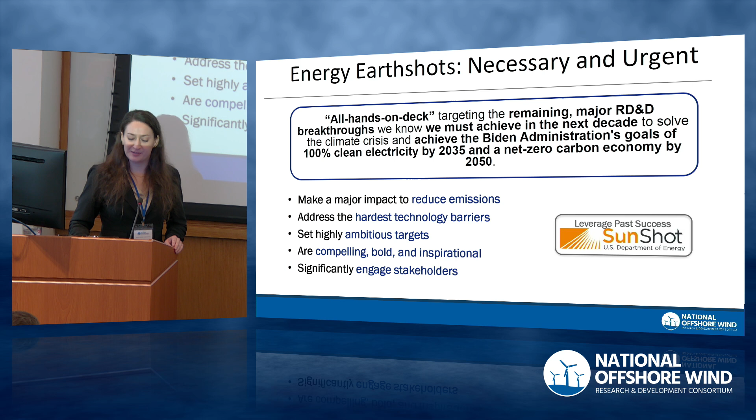Last year in September, the floating offshore wind shot was announced as one of these. This was chosen because offshore wind is especially well suited to provide clean energy to densely populated coastal regions that have large demand and may have limited space for land-based clean energy and transmission. Additionally for the US, about two-thirds of the offshore wind resource is over waters too deep for fixed foundations. So the shot goal aims for a 70% or more reduction of costs down to $45 per megawatt hour by 2035.

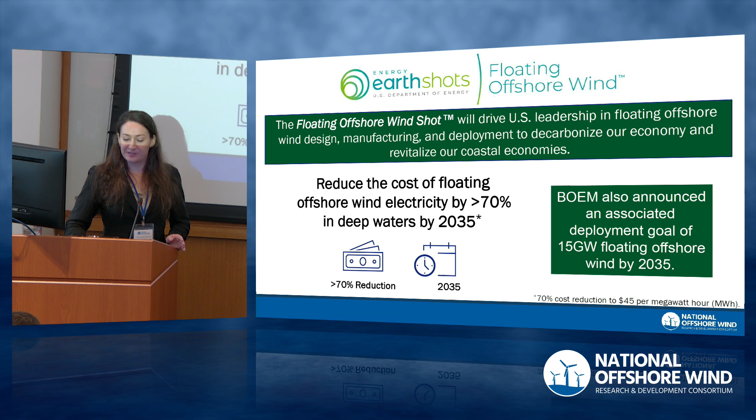Achieving this would drive US leadership in design, manufacturing, and deployment. Along with the shot announcement, the Department of Interior also announced a 15 gigawatt deployment target, with the goal of protecting biodiversity and promoting ocean co-use.

To rapidly move the United States from just technology demonstration towards commercial scale deployment is going to need an all-of-government approach. The floating offshore wind shot is a partnership between Department of Energy, Department of Interior's BOEM, Department of Commerce's NOAA, Department of Transportation, as well as the Federal Permitting Improvement Steering Council.

To address industry challenges and accelerate floating offshore wind, the shot has 5 pillars: developing cost-effective floating offshore wind technologies to harness the power above deep US waters; promoting energy justice with environmentally sustainable and just deployment to ensure marine wildlife coexists and other ocean space users can thrive alongside floating offshore wind; and benefiting local economies and underserved communities to reduce the climate, health, and environmental impacts of the US energy sector.

As well as supporting supply chain development, including port construction, and scaling up domestic manufacturing capacity, especially for turbine platforms and components, while considering local workforce, materials, and infrastructure needs.

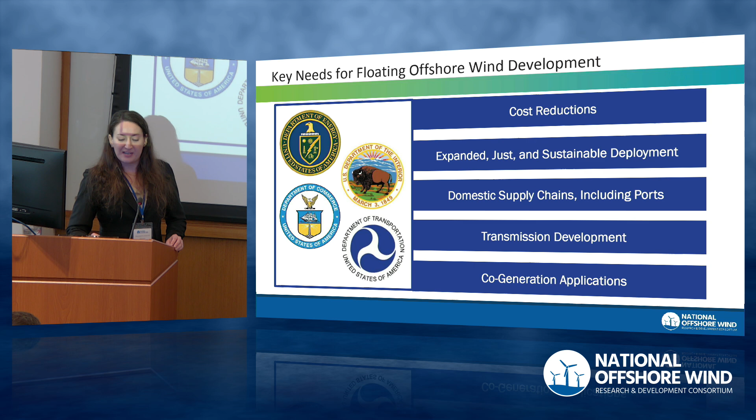Designing transmission networks and configurations to connect the best wind sources to load centers, and advancing research in future transmission technologies, including HVDC, to enable long-distance transmission far from shore. And finally, fostering economy-wide decarbonization by advancing floating offshore wind energy storage and clean fuel production.

The shot is intended to be an ambitious call to action as part of a wider effort to decarbonize the grid.

R&D contributions towards cost reduction can be made across several areas, including large turbines with higher generating capacity while maintaining high reliability of operations, serial manufacturing and design for production, systems engineering and operation, and increasing operational reliability through improved maintenance capabilities and lifetime extension practices.

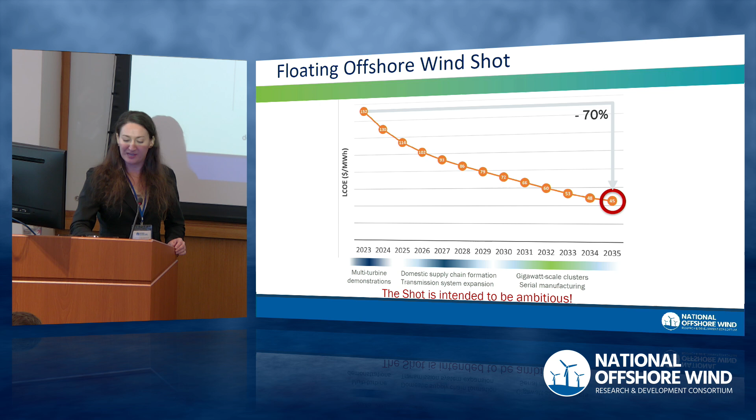Now we'll start the floating offshore wind deep dive. This is the first of two panels. This panel focuses on anchoring, station keeping, and platform stability.

We'll have Zach Miller from Triton Anchor presenting on their innovative anchoring system for floating offshore wind. Spencer Hallowell from University of Maine presenting on design and certification of taut synthetic moorings for floating offshore wind. And Biao Feng from GE presenting on the dual functional tuned inerter damper for enhanced semi-sub offshore wind turbines.

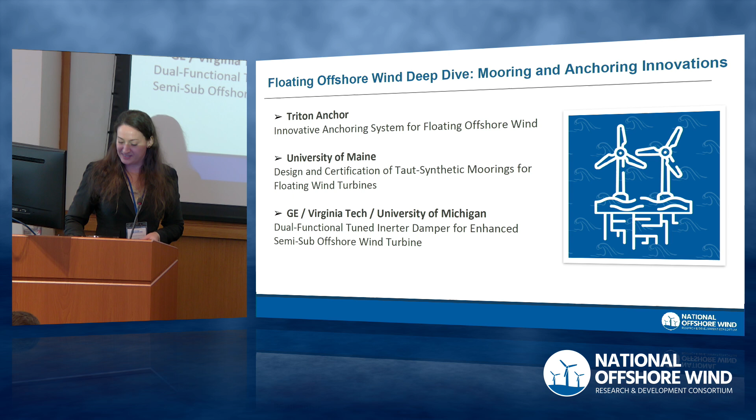Hello everybody, my name is Zach Miller. I'm the Chief Technology Officer at Triton Anchor.

Just a little bit about us: we are a spinoff of a company called Triton Systems. Triton Systems is a technology developer across a variety of different markets, creating new ideas for the country. So now we've officially become a separate company with our own mission and goal. Our mission is basically to provide cost-effective anchoring systems for offshore renewable energy, specifically focused on floating wind. We're right outside of Boston, Massachusetts.

We've had a lot of partners, collaborators, and funding sources over the years. The ones circled are specific to this program that we ran through with NOWRDC. University of Massachusetts Amherst was involved, University of Rhode Island, and American Bureau of Shipping were the ones involved in this specific test. US DOE has funded us several different rounds for our technology, along with Massachusetts Clean Energy Center and California Energy Commission.

So here's our team. I think we've added 5, 6 people in the last 4 or 5 months. We're growing pretty fast here, with a goal of deploying 4 anchors at the end of 2024 off the coast of Oregon for one of our clients. Range of engineers, business development, sales, marketing, executives round out the team.

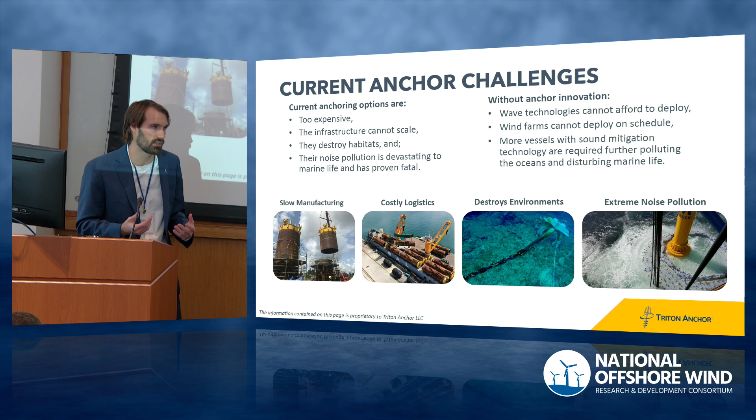So what that means is the current solutions to date, like wave energy, is slightly different than wind, and just can't be affordable, so the costs are even harder there. There are technologies that just can't be deployed. Wind farms potentially can't be done on schedule, and there's a lot of issues with anchors. If you have 3 or 4 anchors per turbine, those quantities are very, very high. Even manufacturing 1 turbine per week, now you're going to manufacture 3 to 4 anchors per week. So it's just a lot of quantities over and over again, and then you need more vessels and more sound mitigation technologies so you don't pollute the marine environment.

So we created a solution about 7 years ago using helical piles. Helical piles are used for land-based infrastructure - this building might have helical piles on it, bridges, guy wires, things like that. What we're doing is using that same size they use for land-based infrastructure. Instead of scaling up the helical pile size, we use that size and a quantity - we tightly cluster them together, and then bound it by an exterior caisson skirt. The skirt is more short and stubby to provide resistance laterally, and provides a solid foundation for the whole anchoring system.

Ultimately, our system can be done for any type of platform - semi-submersible, spar, tension leg system. We can handle any type of loading direction: vertical loads, horizontal loads, multi-directional loads, shared anchors, things like that.

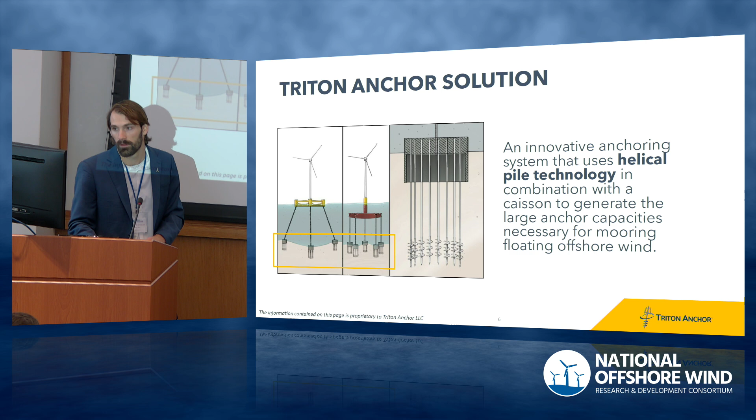So the main focus of the NOWRDC program was going through the American Bureau of Shipping new technology qualification process. That process for ABS is a 5-stage process. 4 of the 5 stages we did under the NOWRDC program, and we completed all those stages with ABS - reviewing and witnessing engineering calculations, risk assessments, manufacturing plans, test results, numerical analysis, and a variety of other engineering items. We're currently performing the last stage in 2024 to become a fully qualified new anchoring system.

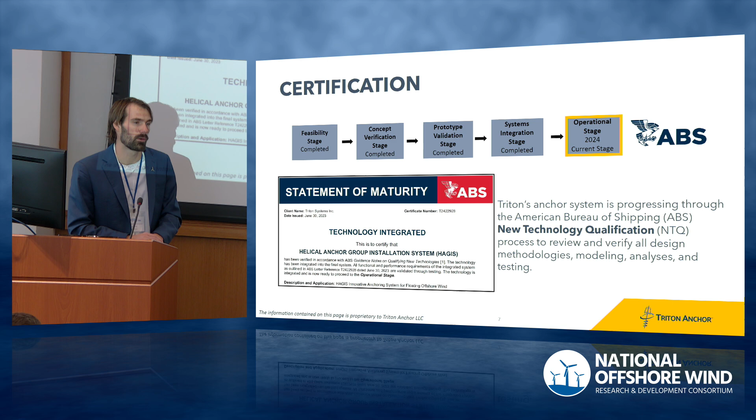One of the biggest tasks associated with those first 4 stages was site investigation, designing, manufacturing, installing, and testing anchors to qualify our analysis for larger commercial scale anchors. Since we can't actually test full commercial scale anchors, we have to build smaller anchors, model them, and then use that analysis to scale up.

So these are the 2 anchors that we built and installed. We tried to go as big as we could given standard US DOT restrictions, while also being cost effective to pull out, because we pulled these anchors to failure to get a lot of variety of testing. You can see we did one that was tested more vertically, and one that was tested more horizontally. The anchor weight is about less than 7,000 pounds.

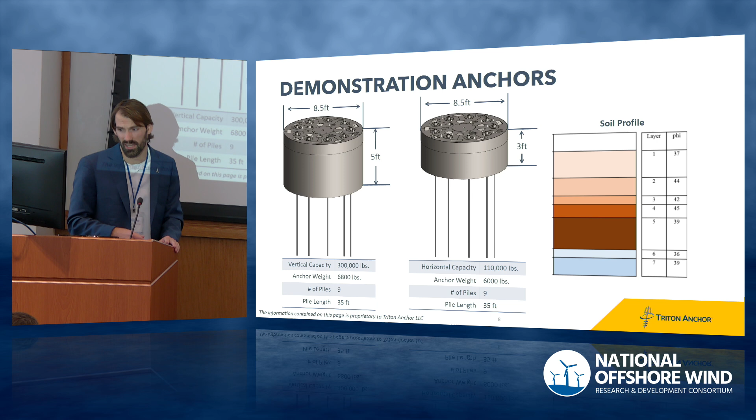We wanted to do the same number of piles - we tried to do as many piles as we could, because tightly clustering helical piles is one key aspect of our design. And then we went to the same depth, to avoid having too many different factors.

So basically what we did is we went out and manufactured these anchors, then brought them to the test sites. The University of Rhode Island has a research farm in a low basin, so the water table is pretty high - it kind of naturally mimics wet soils. We then built an installation tool, a proprietary installation tool that installs our anchoring system. You can see in these photos where we're taking the anchors off of the trailer.

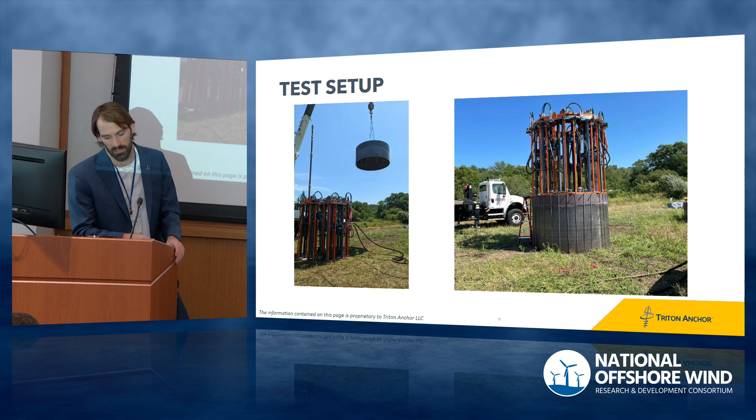And then the other photo shows the installation tool on top of the anchor about to be installed. So this is kind of the installation process in picture format. As you can imagine, basically the tool starts on top of the anchor, and then we screw the helical piles in, and then we push the caisson in at the same time.

We then tested out an additional method of basically jetting in the skirt. To help us, we measured the capacity necessary to install it without the jetting, with the jetting, to see what the forces were. And then ultimately, the far right picture is basically the fully installed anchor.

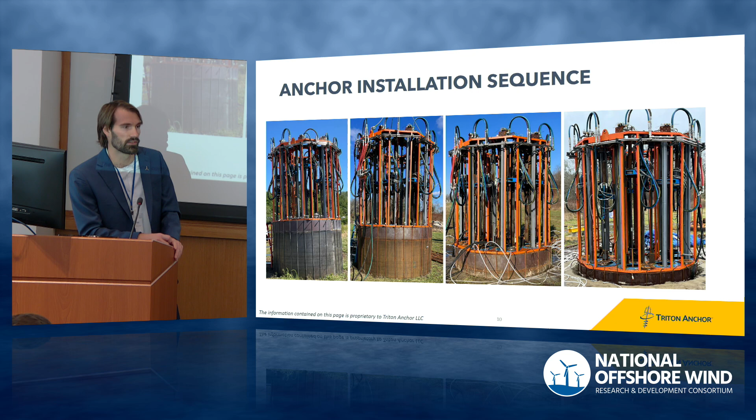So we did that twice, and then we basically did load testing. So the picture on your left is the test for the pure vertical loading. Just given the constraints of what was available to us, given a reasonable cost and budget, we basically just did a pure vertical test and then a pure horizontal test. So a big load beam across the anchors, some cribbing so it reacts against the ground, and then a load cell hydraulic jack attaches to the center of the anchor, and we pull up.

And then the one on the right-hand side is the pure horizontal load, so we attach the 2 anchors together. It was actually cheaper to use our failed anchor, well, the one that we just did a vertical test on, as the reaction to the other one that we're testing for the horizontal. That was actually cheaper than them installing their own foundation to test against. So we were like, well, why not, right? And then basically 2 jacks on either side, and then a big wire rope basically connecting them to provide the load.

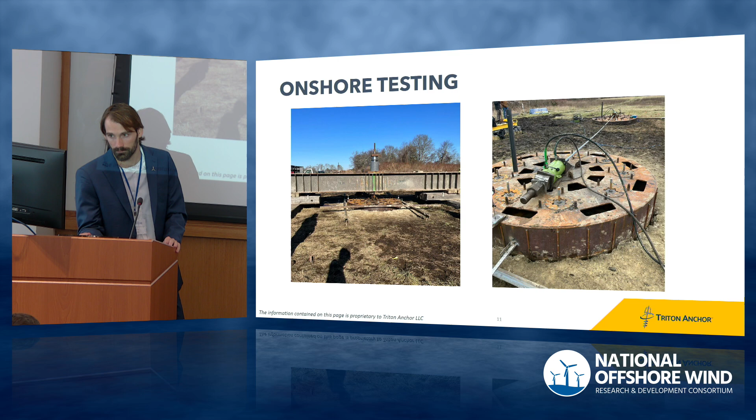120 tons is what we expected for failure for that. And then we were within 113, 116 tons. So about 3% error on the pure vertical test.

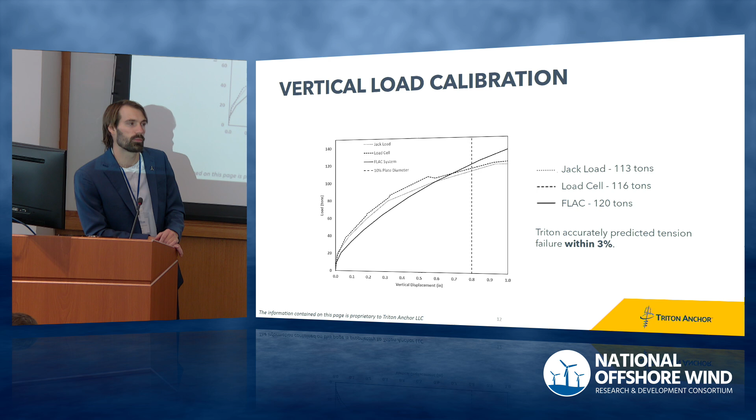The horizontal one, similar results. Again, we're focused on the dotted line, the vertical dotted line is where we define failure. And we anticipated about 75 tons, and it came in about 72 tons. So again, about 4% error, well under 5% error, which we were shooting for basically 5% under. We've since then updated our models. So basically, based off these results, we've gone back and updated models, and so we're better than these 3 and 4% failure criteria now.

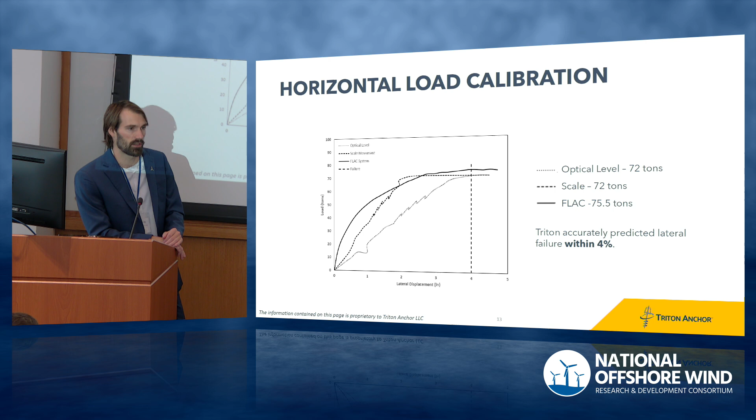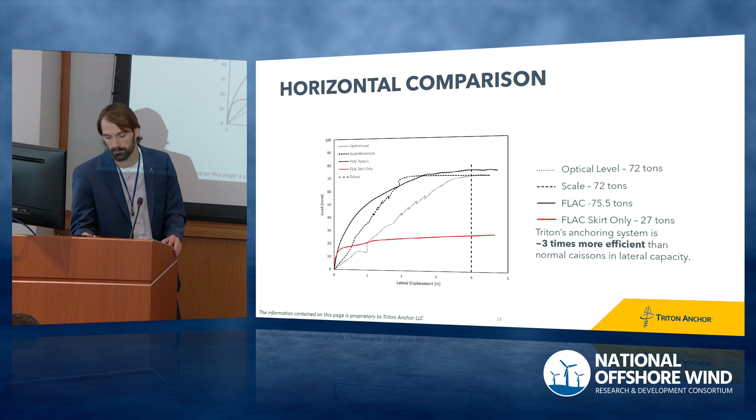That's what I have. We can take questions at the end. Thank you.

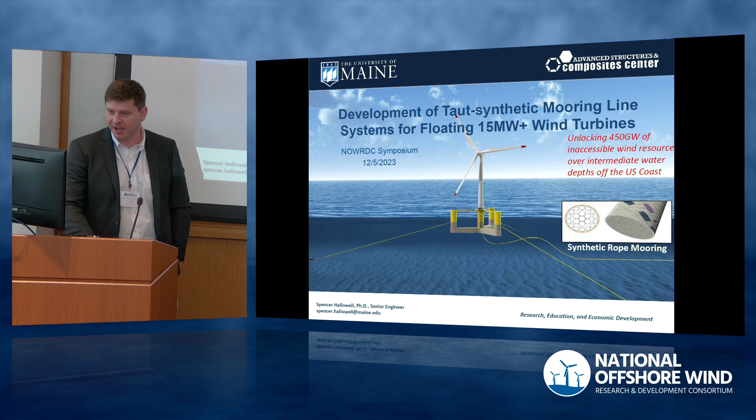This talk today will be about the development of a taut synthetic mooring system for shallow water for a 15 megawatt floating offshore wind turbine. And this NOWRDC and NYSERDA sponsored research is just closing out, so this may be the final time that I get to talk about this. And we have kind of exciting results that I can summarize for you today.

So overall, our project objectives for this were to develop a 25% FEED, that's front-end engineering and design, for a nylon mooring system and anchors for a 15 megawatt floating offshore wind turbine, but for 56 meters of water depth. For those of you that were in one of the last sessions yesterday looking at some of the foundation technologies for fixed base, we saw some water depths maybe up to about 60 meters. 55, 60 meters of water depth is very shallow for floating offshore wind, and it poses several challenges. You can no longer use just plain catenary steel chains.

It becomes incredibly expensive and costly, and staging things for floating wind in those depths doesn't become very cost effective. So this project looked to use new synthetic mooring technology, which is proven at least for polyester in the oil and gas industry, and at least for nylon here, we have several demonstration projects in Europe that use nylon permanent mooring ropes to see whether we could push the limit of these shallow water depths, and make it viable for floating wind in these transitory areas.

We then validated our design through numerical model tests. At the University of Maine, we have a wind wave basin where we can test scale models of floating offshore wind turbines. Using those tests, we can ensure that the global performance of the mooring system and the floating offshore wind turbine model match what our numerical models used in design say. That's a validation process, and it was validated through third-party review from National Renewable Energy Labs.

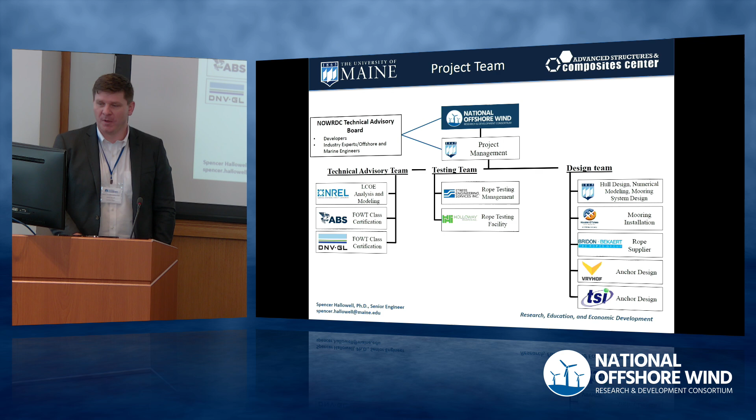The design team included the University of Maine, who led everything, as well as several partners to make sure the design we were coming up with was realistic and would actually work for a floating offshore wind installation. That included Houston Offshore, now Kent, who provided us an installation procedure for our mooring system. Bridon-Bekaert provided us with the initial rope properties, as well as the samples of the sub-ropes and full-scale ropes that we tested to failure. Vryhof, now Delmar Systems, provided us anchor designs, and Triton provided us a helical pile design as well, so we could see the effect of different anchoring designs on the cost of the synthetic system.

So all of that being said, this is what the design of our system looks like conceptually. We have a relatively tight mooring radius. We wanted to push the limit of how small we could go for mooring radius here. The radius is overall 300 meters from the center of the floater out to the anchoring points. Since the floater is very large for a 15 megawatt system, the radius from the edge of the hull out to the anchor point is only 242 meters. So we really pushed the envelope as to how small we could go.

The system is in between a taut and semi-taut system, so we have a length of anchor chain connected to the anchor, which is then connected to a nylon tether up to the fair lead chain. The nylon rope diameter was 220 millimeters, so it's quite large. That has a mean break strength of about 13,000 kilonewtons. We're talking very large, very strong ropes. We included positive buoyancy within the construction of the rope.

For those of you familiar with some of these systems, you sometimes need to put buoyancy within the line to ensure that the synthetic ropes don't touch down on the seabed. That's a very important condition for certification bodies to ensure that the integrity of the rope is maintained throughout its lifetime. You can achieve that in several ways.

You can have a buoyancy module connected somewhere in the length of the mooring system. Bridon-Bekaert offers a product where they actually integrate pieces of foam in the rope construction to provide that buoyancy. We opted for that system because we like the idea of having fewer things, fewer connections. We think that's a really resilient way to do mooring design.

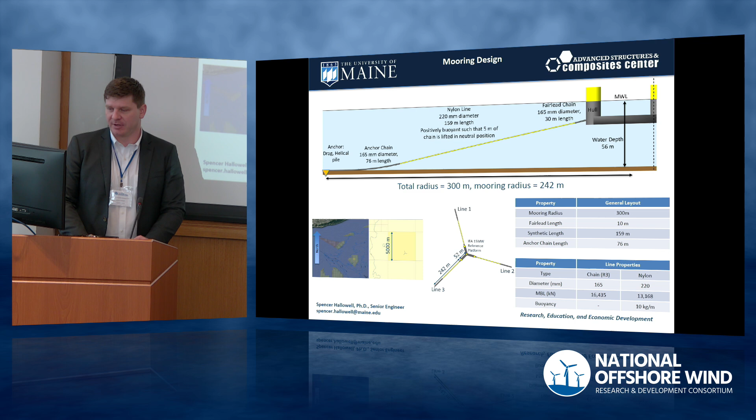We've also pushed the Stevpris, the Vryhof drag embedment anchor, which has uplift capacity as long as that uplift is temporary. So if you're uplifting that drag embedment anchor only for several seconds, which is the case in some of these ultimate limit state conditions, it can survive those cases. As long as the mean uplift angle remains relatively low, or almost perfectly horizontal, ABS has approved the behavior of that type of drag embedment anchor.

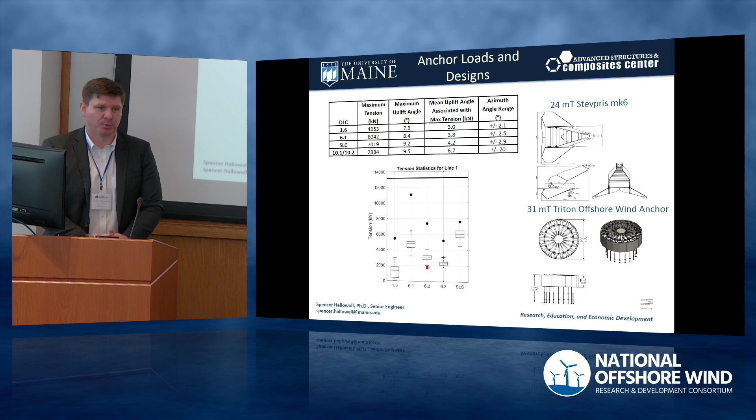This was a unique and novel way to model those nonlinear systems. When you have the wind turbine scale model, we use Froude scaling to get the 15 megawatt turbine to fit into our wind wave basin, but the material properties of the mooring lines you can get off the shelf, whether monofilaments or thin steel cables, don't match the stiffness of a real nylon full-scale rope. So you have scaling issues with these basin model tests. Now that we have this linear actuator technology, that scaling issue becomes less important, and we can have a lookup table that exactly replicates the behavior of the mooring system.

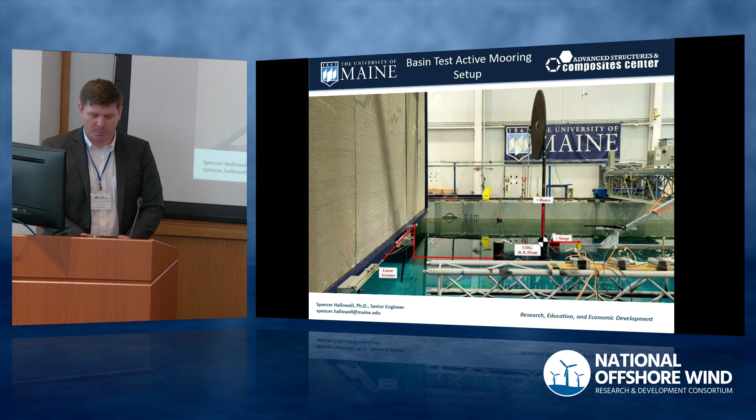The next new task I haven't presented before is the results of our sub-rope as well as full-scale rope testing.

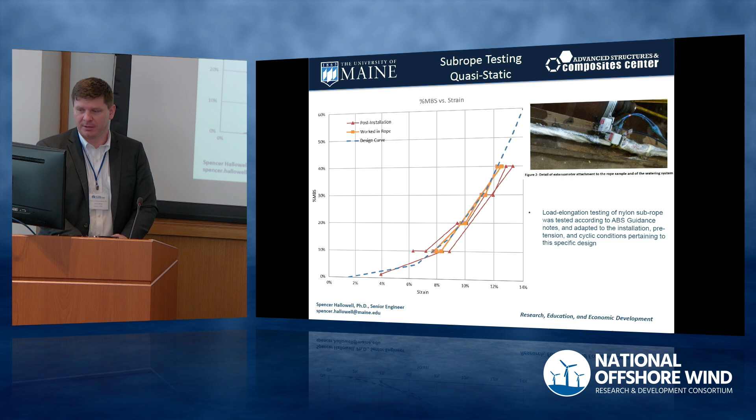So those were quasi-static stiffness tests, where you pull on the rope relatively slowly. The next thing was to confirm the dynamic stiffness of our rope.

As I said at the beginning, we have different stiffness properties of the rope depending on the mean load levels and load ranges. In this case, we did find a little deviation from what we used in design versus what we tested. The difficult thing is getting the low amplitude stiffnesses correct. In this design we have a lot of low amplitude action for many operational cases of the wind turbine, so we found about 25% error in the stiffness at these low load levels. That means at a more detailed design phase, we would update our analysis and load model to make sure we're getting the appropriate stiffness levels at the load ranges that control the design.

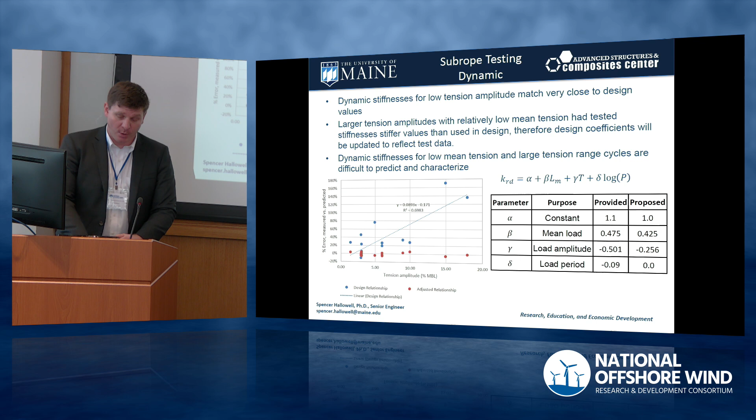We propose here that you can update your parameters, for those familiar with the quasi-static and dynamic stiffness analysis method. In the second column, the 1.1, 0.475, that's what we used in design. We can use updated sub-rope testing to go back and reevaluate our dynamic stiffness with new constant and mean load amplitude parameters, and hopefully get a better view of the realistic behavior of the system.

This is where I wish I had a video, because we also did full rope testing, both cyclic and break tests. The nice thing about video for cyclic tests is you can see how long these tests take. We tested over 10,000 cycles, which for fatigue testing doesn't sound like a lot, but the load and stroke the system has to pull on these ropes means strain levels up to 15, 20, over 25% elongation, so the hydraulic system is very taxed. This is an incredibly strong, incredibly stiff rope. It takes a lot of energy, so our 10,000 plus cycles took almost 3 full days for our cyclic test.

It was done in Houston in September, and for those familiar with the weather down there, it was over 100 degrees. They had to shut down the hydraulic system several times during this test. We're constrained by the capacity of testing facilities that can actually test ropes this size, and even bigger, which is what we'll need for bigger floaters and deeper water. Even with facilities that do exist, there are constraints, because we have old systems designed to test offshore oil and gas products, and now we're looking at bigger and different products with a lot more elongation, which is difficult for hydraulic systems.

So the idea is we did one full cyclic test of a rope. We didn't take that to failure—of course, if it failed at 10,000 cycles we'd be in trouble. What we did is cycle it 10,000 times, then tested that one rope to failure to ensure it matches the break strength of the two remaining samples we had.

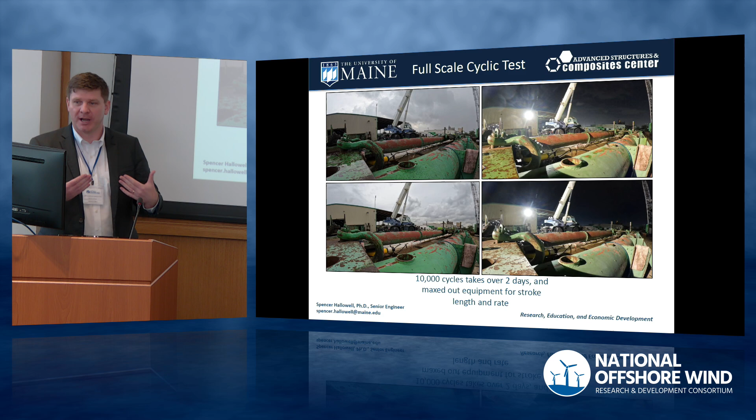I wish we had a video here, but this is the setup of the break test. The reason a video is really impressive is the video starts with an air raid siren, because you don't want anybody anywhere near this when it goes off. The amount of load and elongation, meaning energy in the system, is actually quite spectacular at failure. It becomes very dangerous, and in a video, when it lets go, it sounds like a gunshot—it's like an explosion of energy.

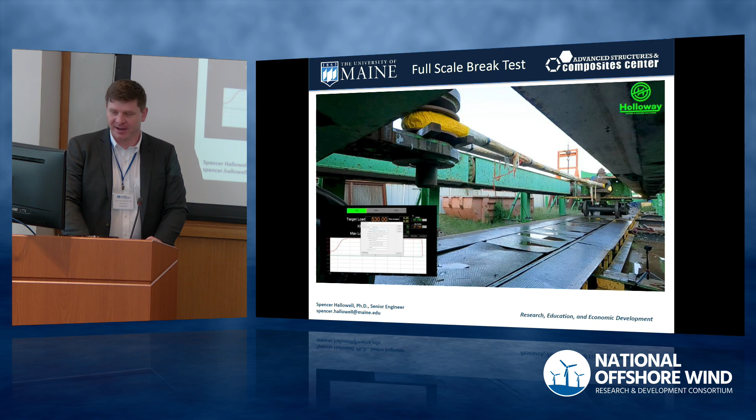Pieces of rope go flying everywhere, water spraying everywhere because the rope is fully saturated. It's a really fun and impressive thing to see.

This is what the rope looks like as it's failing, so we can slow it down—you can do it on an iPhone now, and we did it on an iPhone. You can slow down the frame rate really low and see the ropes actually retracting. The load-bearing fibers inside the polyester overlay start retracting back out to the splices where they connect to the eyes of the testing rig, and that happens over a factor of a couple of milliseconds.

We tested these ropes to over almost 1,300 kips and 40 inches of displacement stroke in the system. If you do that energy calculation, it's equivalent to over a kilogram of TNT exploding in this test rig. That's why the air raid siren goes off, and it's really cool to see this failure progressing along the length of the rope.

The other interesting thing is all 3 ropes failed in different ways. This rope in particular was the one that was cyclically tested, and it failed within the gauge length of the rope—you could see the load-bearing fibers retract out to the splices. The other 2 ropes were combination failures, and actually the failure initiated at the splices. That's another thing that becomes very difficult with synthetic ropes: when you make the splices, the portions of the rope connected at the ends, you have to hand lay that.

From what we've learned, that is both an art and a science. It's a very important way that the loads get shared across the fibers to ensure that when you make that splice, it has the capacity of the full rope.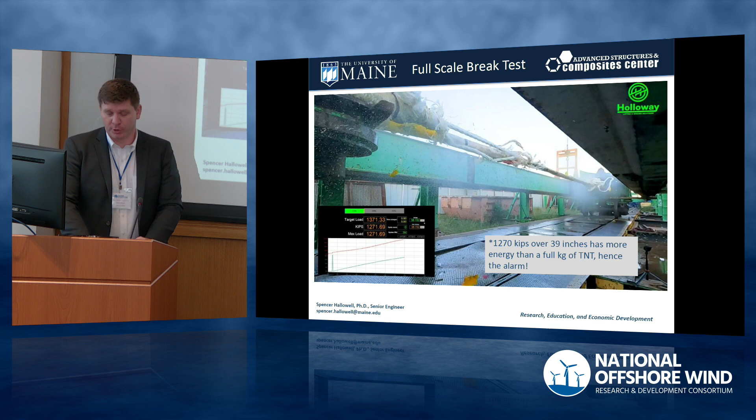Now, we don't know if that's just variability in the rope construction. If you test multiple samples, of course you're going to have variability in capacity. Or it could have seen a little bit of cyclic degradation in the 10,000 cycles that we had. More work would certainly need to be done to do so, but these fatigue tests and full-scale tests are time costly as well as monetary costly.

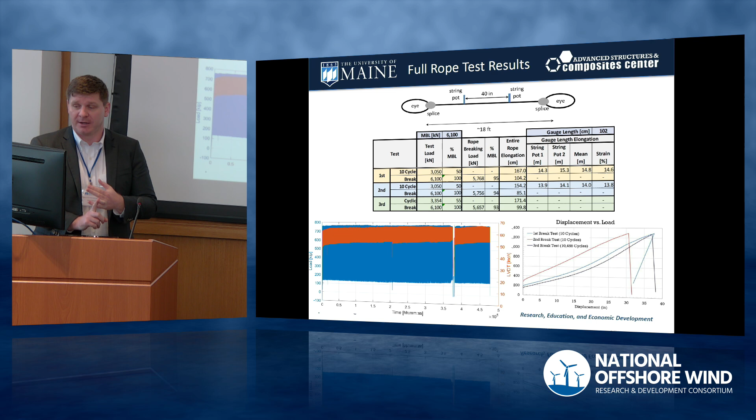So that makes things quite difficult. To wrap things up, we wanted to look at an economic cost of what these systems would look like compared to a typical catenary system that might be costed for shallow water. Of course, we're not going to go to an incredibly heavy system in shallow water for a catenary chain, but we wanted a cost basis for comparison so we can understand whether this is reasonable to install and if there are any cost savings.

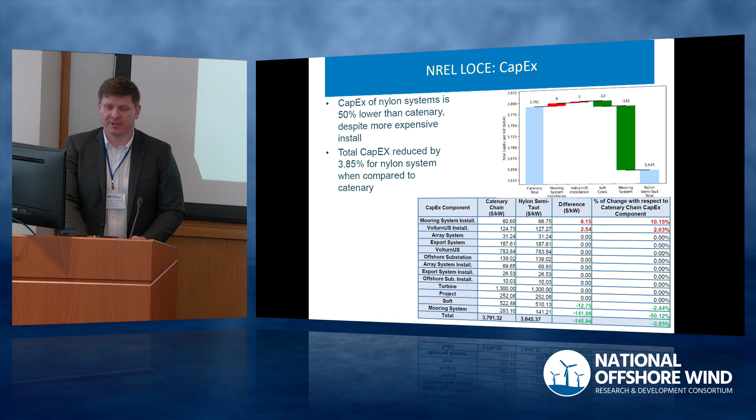In terms of CapEx, compared to a catenary system, which of course probably isn't the best system for a really shallow water installation, we saw just over 3.8% reduction in CapEx. And when you look at the entire array, in this case a 40 turbine array, we saw a total reduction of 2.7% in the LCOE of the entire system.

Mooring systems, it varies what the LCOE component would be for a floating offshore wind farm. But in this case, going to a semi-taut system that uses synthetic ropes and nylon in particular can give almost a 3% reduction of cost for 40 wind turbines.

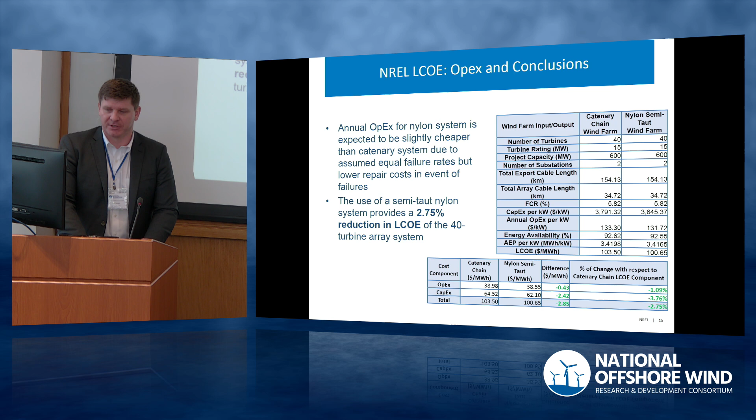To conclude, I think we pretty successfully designed a shallow water synthetic mooring system for a New York Bight specific location. We looked to do 2 different anchor sizes, which were both approved by ABS to be used for this type of concept, and we saw a pretty significant reduction in levelized cost of energy for a 40 turbine system. We developed a 1/70th scale model test and a novel way of doing active mooring control for nonlinear mooring design, and we looked at sub and full scale rope tests to confirm the design assumptions used for our global performance analysis.

Looking ahead to the future, I mentioned we're going to be looking to do some work for deep water systems in California. There's a question about what the low tension fatigue performance is for synthetic ropes, especially nylon. That question of whether or not those 10,000 cycles degraded the rope is a pretty big one outstanding in both the literature and industry.

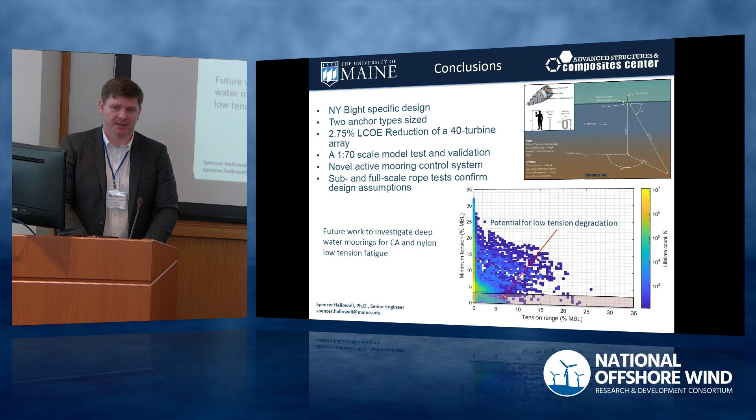We're also looking to see if we can come up with a test procedure that doesn't require full-scale rope tests, because like I said, they're costly, expensive, time-consuming, and if you're going to have to do multiple ropes per wind farm, we're going to exceed the capacity of the testing facilities in this country. So we need ways to test ropes faster and better.

And with that, I look forward to your questions. Thank you.

It depends on different style. Currently there are so many different styles of floating systems. I think the most popular one is what we call semi-submersible. Those are typically very wide, pretty shallow, usually have 3 big cylinders halfway submerged into the water. The advantage of this system is they are really easy to assemble. Basically, you can assemble this system onshore, and then have a boat drag it out to the site and anchor it right there. That's the attractiveness of this style.

The problem is this style of platform is very flat and very big, so they vibrate quite a bit. So besides the bigger loads you have to deal with, the second issue is the vibration. If you have a fixed wind turbine put on a floater, what you will observe, for example, in the pitching system, is nodding of the system. Sometimes the system amplifies, so you pitch more and more, and the whole system just shakes.

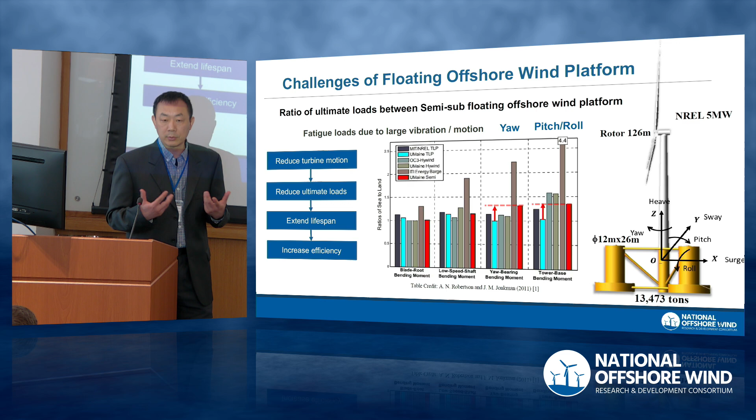A way to deal with it, obviously, is you can feather or pitch the blade away from the optimal angle to stabilize the whole system. But by doing so, you sacrifice the production of energy. So it's very critical to have some sort of mechanical damper to stabilize the system, either by control - you can have a smart control system, or a damping system, vibration absorber, sort of, to deal with it.

So just quickly, a very common method of putting a damping system in a big structure like this - we're talking about thousands of tons of steel - is what they call a tuned mass damper. An example here is the Taipei 101 in Taiwan, one of the largest tuned mass damper systems, implemented on the top of the building mainly for earthquakes.

So the idea is, if you have a really big mass M0, you attach to it a relatively small mass M with stiffness and a damper, or viscous damper. When the big mass M0 starts to vibrate, the idea is you want to transfer all the kinetic energy to the small mass. So the big mass remains stable, and the small mass vibrates like crazy. That energy essentially goes to this C, the viscous damping system - that's where the energy channels to.

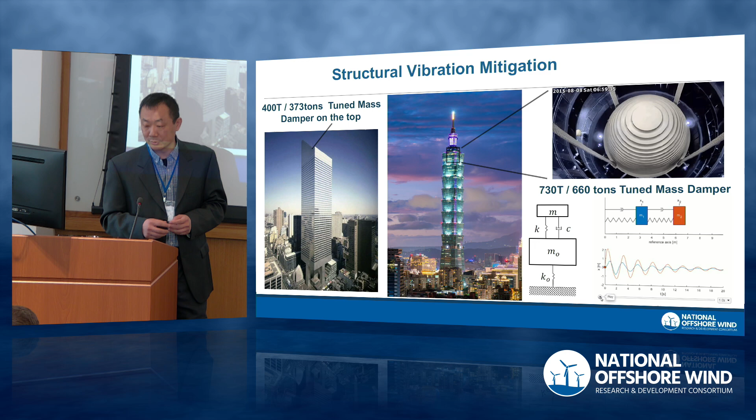For wind systems, because we are dealing with a very large mass, a very large system, to make this system effective, the small mass needs to be typically like 5% to 10% of the big mass. You cannot have a really tiny mass attached to a huge gigantic mass and expect this to be effective. It is okay for some systems, but for us, even 5% of mass is lots of metal we need to add to the system. So we need to find a smart way to deal with it.

One improvement over the traditional tuned mass damper is we use a so-called inerter system. The inerter is a system proportional to the relative motion between the small mass and big mass. In our case, we want to add a generator or energy harvester system between the small mass and big mass. So the idea is, instead of channeling the kinetic energy to a viscous damper, which basically turns into heat and dissipates away, we want to channel this energy to something more useful. In this case, you can think of channeling that energy to generate additional energy.

There are two benefits of doing that. Obviously, you gain additional energy by channeling this - something like 5% of your production energy, additional energy. The second thing is this will provide an amplification effect of your damping.

So when the big system starts to vibrate, the small mass vibrates a lot, as I mentioned, when resonance occurs. So you hold a generator against the small mass vibration, essentially holding the system from vibrating a lot. It's like driving your car downhill and putting it in low gear - the engine spins faster, holding the car back, so you don't have to apply the brake all the time. This is the same effect. You can apply a flywheel, if you would, at the end of the system, which holds the vibration from going crazy. This is the means of amplifying the damping effect and also providing additional energy. That's the main principle.

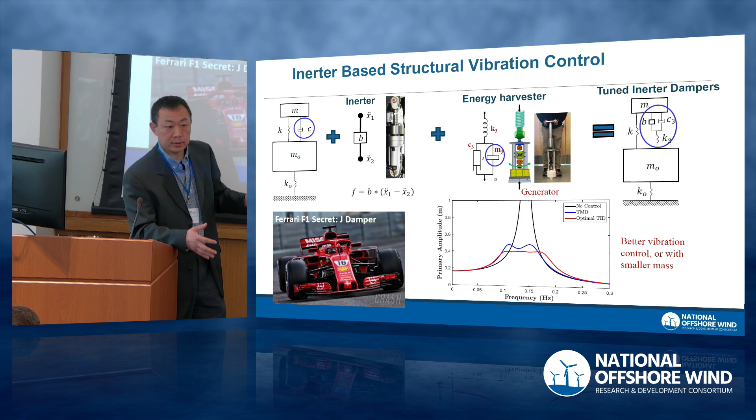Theoretically, you can see, without any control, the thing will vibrate quite a bit. With the TMD, the tuned mass damper - the blue line - it will damp out the system. But if you add this TID system, as we call it, it's going to further damp out the vibration, as well as generating about 5% additional energy. So basically, you channel this vibration energy into the generator.

Our target is to stabilize the platform by 20 to 40%. In addition, ideally we want to harvest an additional 10% of electricity. Right now we are looking at somewhere between 5 to 10%, and that has to be optimized. So you have a dual target: minimize the vibration and maximize the additional energy. In a sense, you cannot satisfy both, so you play with the game to find a sweet spot to have both reasonably good. We also want the system to be retrofittable to most existing systems.

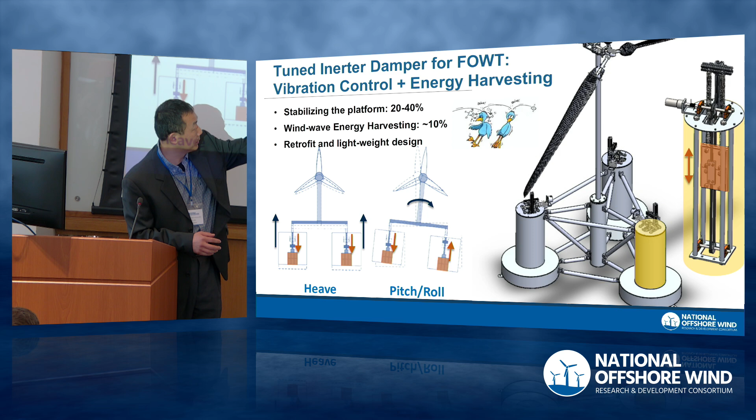What you saw here is a standard NREL 5 megawatt kind of design with big cans. Those cans are about 12 meters in diameter, about 20 meters long, each of them. So we want to use the empty space inside the can to put a mechanical system like that. I'll explain a little bit more how this works.

Some results from the analytical study: we mainly target the pitch angle, which is the system nodding back and forth. Heave is the system moving up and down. Pitch is the most critical because in the wind, the thrust load is the largest. When the thrust load is being amplified, right now the only way is to cut back your production - basically you pitch the blade to reduce the load and stabilize the whole system. So that is the most critical motion we try to damp out.

There are two lines on this chart: a red line and a blue line. The red line is the TMD, the traditional tuned mass damper, and the blue is the TID, with this additional inerter in the system. What we want to demonstrate is that if you draw a horizontal line for the same percentage of vibration reduction, jumping from the red line to the blue line, you can use about 1% less mass to have the same effect. This effect is even more with the heave motion - you can get about 2% reduction in the mass. So previously you needed 5% mass to damp out your bigger mass; now you can use 4%. In the heave case, you can even use 3%. So we are achieving about 20 to 40% reduction in the mass.

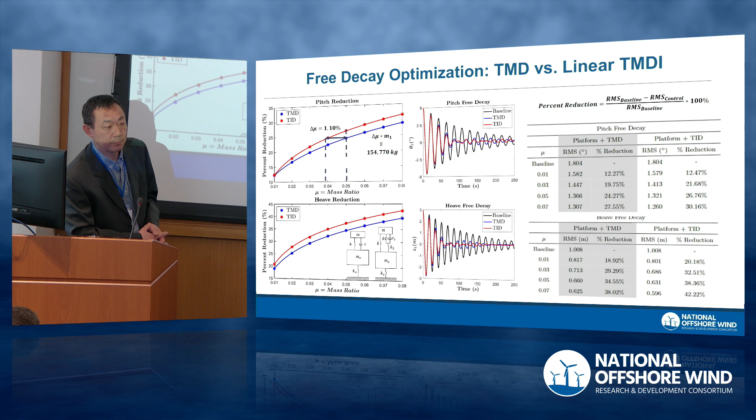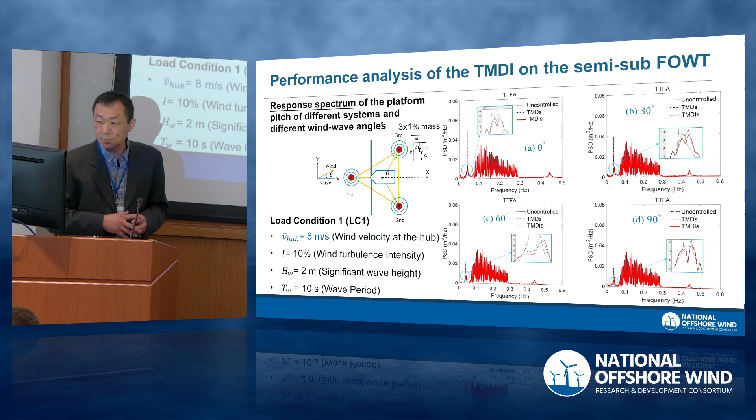This picture shows the frequency domain, the same simulation as the previous slide which showed the time domain. This demonstrates the system is capable of damping out a peak, which in this case is the natural water frequency. If you let the system nod in the pitch direction by itself, that would be the frequency you saw - a pretty low frequency, but the system is capable of damping out lots of vibration. The zoomed-in version shows this with all angles: 0 degree means wind and wave come at the same angle, 30 degree is wind and wave with a 30 degree angle apart.

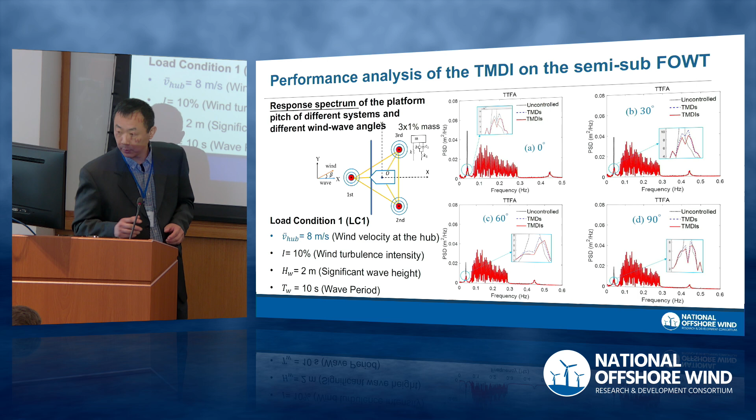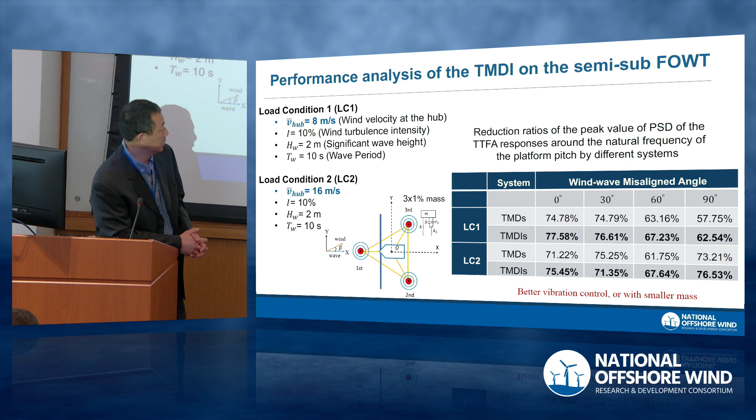More results - we're also looking at the higher wind case. In this load condition 2, we have 16 meters per second wind speed. The table on the right shows the reduction of vibration, and across the board, with different angles, this system works. It reduces a lot of the TTFA response - tower top fore-aft, the nodding motion of the tower top. Across the board you see a huge reduction. Comparing the traditional TMD and TMDI, the inerter works better. But the inerter has a second benefit, as I mentioned: it will generate additional energy.

There's some mechanical device we need to design, because as the system moves linearly, the small mass moves inside the cylinder, moving up and down.

It drives a generator. The best way the generator works is rotating in a single direction. So if you have a generator rotating this direction and then reverse, the generator won't work half of the time. So we have to design what we call a mechanical motion rectifier.

It's basically a small gearbox. This gearbox turns up and down motion into a single rotating degree of freedom, so it always rotates either clockwise or counterclockwise. It never reverses. The way we do it in this case is we have 2 one-way clutch, one-way bearing systems.

So these bearings, you can only rotate one way, and if you want to reverse, it will stick. So you have 2 of these bearings, one on each side, and in the middle it's a traditional rack and pinion design. There's a linear motion that can go both backwards and forward, but when you have 2 of these one-way clutches on both sides of the rack and pinion, you turn this 2-way rotating up and down motion into one-way directional rotation.

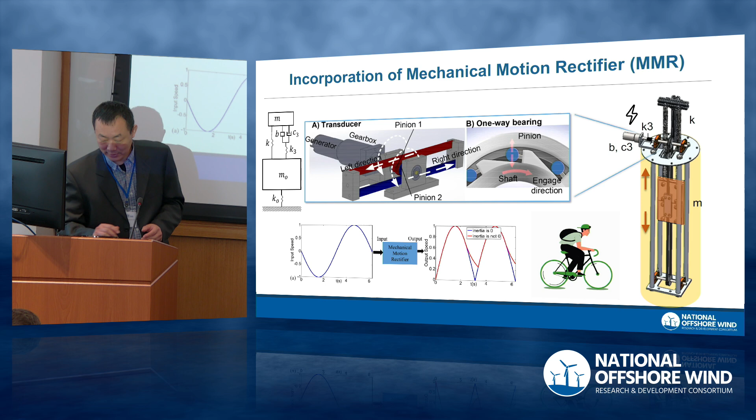Because of that one-way clutch, now the mechanical system theoretically has a period where the system disengages from the generator. So we have 2 different cases: engaged system and disengaged system. You can optimize with the system. The chart, the frequency domain chart on the right, shows 3 different systems basically.

The first is the pure tuned mass damper. The second is TMDI, but without this one-way clutch, so basically it's a flywheel system. The TMDI can go both ways.

The final system is more realistic. If you want to put a generator, the generator only spins one direction, so you need what we call MMR. Now you can tune the system to one way or the other.

As you can see, the TMDI dual direction system, in terms of pure vibration reduction, works better. However, the TMDI with the MMR is better because it has additional energy generated. So these 2 systems you can tune one way or the other, and we try to hit both basically with this setup.

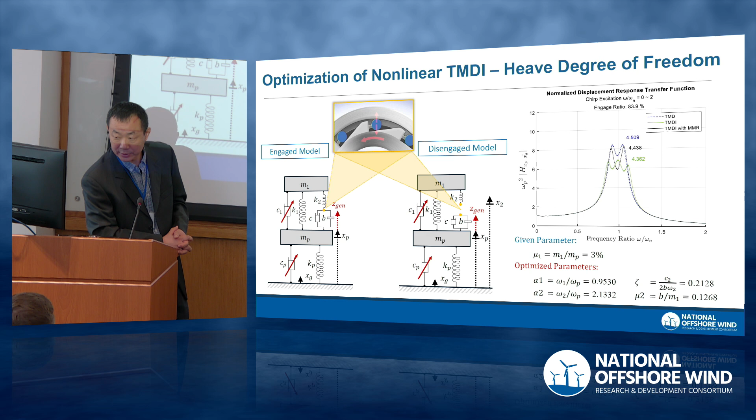Another thing we are doing currently is trying to optimize the energy production with the additional generator. We want the system to be engaged as much as possible. Even when you have a period where it's disengaged, you rely on the generator inerter in that case.

With a little mathematical work, we start with a simple system we call swept sine excitation. It's a standard way to design a vibration system. Basically, you have input with a bunch of sine waves of different frequencies, so it's all sine wave but they come with different frequencies. You want the system to handle all different frequencies of sine wave.

So we optimize this system. Currently, we can have 350 kilowatts at the maximum output with this additional energy, and the system is engaged about 84% of the time with this setup. Obviously, the real situation is more complex than a pure sine wave.

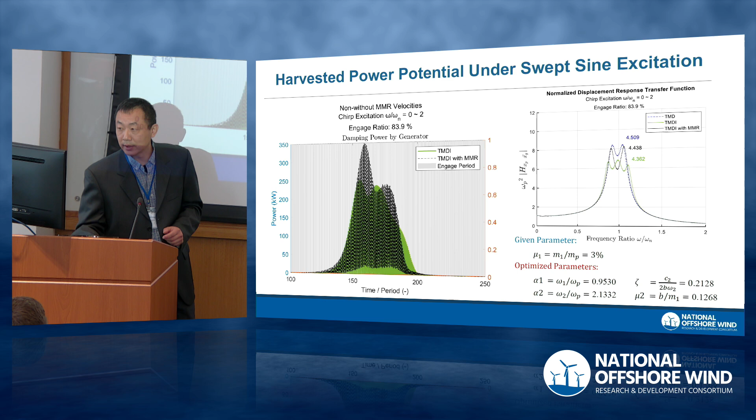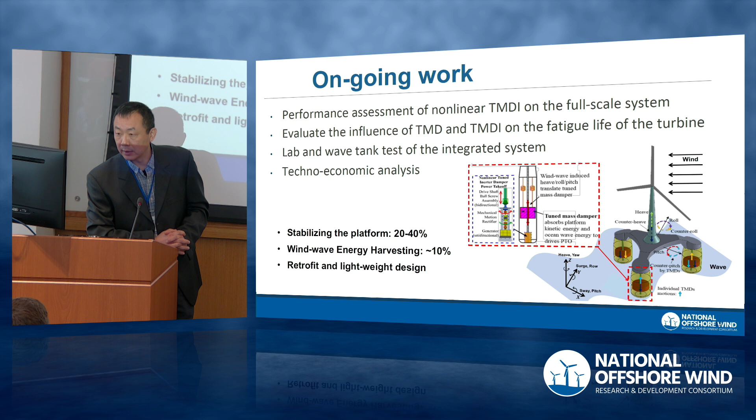So I think we are working—let me just jump to the last slide. Yeah, I think we are working on the full-scale system currently, trying to optimize for the entire system. Last one. All right, so this is the last slide.

Just to summarize, I think the inerter system seems to be promising. It works better than the pure TMD. It also provides additional energy generation. Now, 10% seems like a small number, but it could be critical in case, for example, you have a storm situation.

Your system is down, you have to shut down your turbine. This additional vibration-induced energy can be very useful to help run the pitch, run the yaw system even. Currently, in the turbine, we have a battery system, but it only lasts a couple of minutes. So this additional 10% energy is extremely useful for many things: maintenance, emergency systems, extreme load reduction.

It could be very beneficial in many circumstances. I think currently we are working with the MMR system, trying to design a more realistic one. Basically, this is a one-way clutch system to turn up and down motion into one rotating direction. This will drive a rotary generator, but we have to optimize the system. Currently there's two different targets: vibration versus additional energy, and we may have to find a sweet spot to work on both.